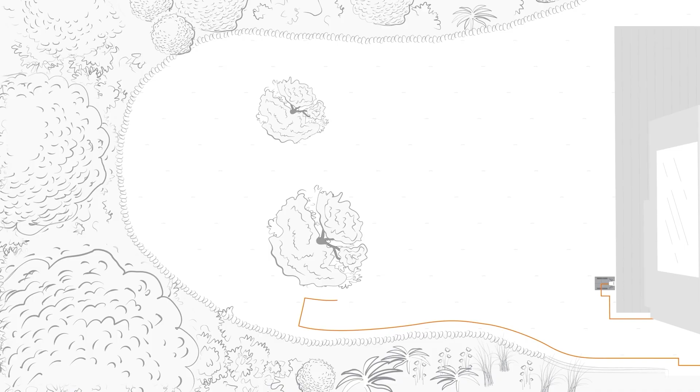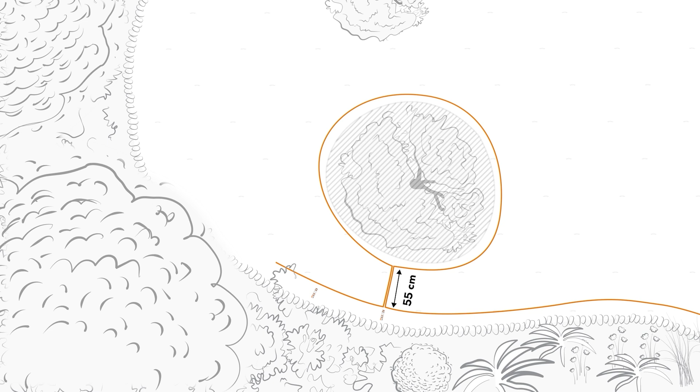Restricted areas that should not be navigated by the iMOW must be installed directly while routing the perimeter wire. To achieve this, route the wire away from the perimeter in the direction of the restricted area. Make sure to comply with the minimum distance of 55 centimeters. If in doubt, check the quick guide. Ensure that the wire runs back to the perimeter in parallel lines, close to one another. The perimeter wires should not cross each other.

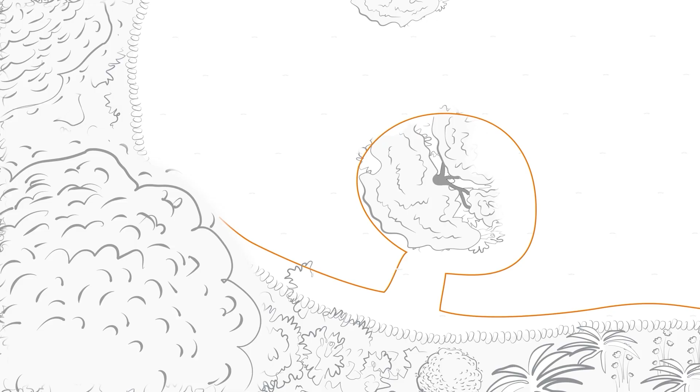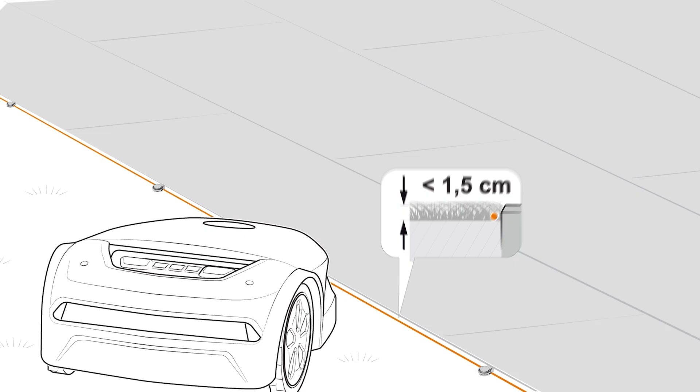Drop-off edges and water areas require a clearance of 100 centimeters from the edge. No-go areas must be blocked off at a distance of one length of the iMOW ruler. Level, navigable areas can be wired directly adjacent, as the iMOW can simply drive over edges of less than 1.5 centimeters.

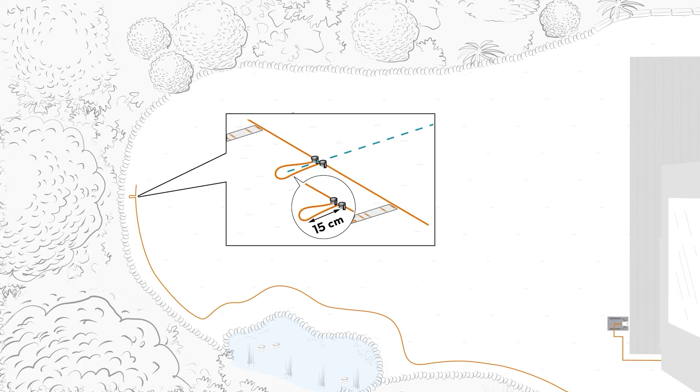Remember to install the connecting point for the guide wire during routing the perimeter wire. This connection point should be placed at the furthest point from the docking station. To do this, secure the perimeter wire at the intended area with fixing pins and form it into a loop with a length of 15 centimeters. Cut the perimeter wire at the end of the wire loop with a wire cutter.

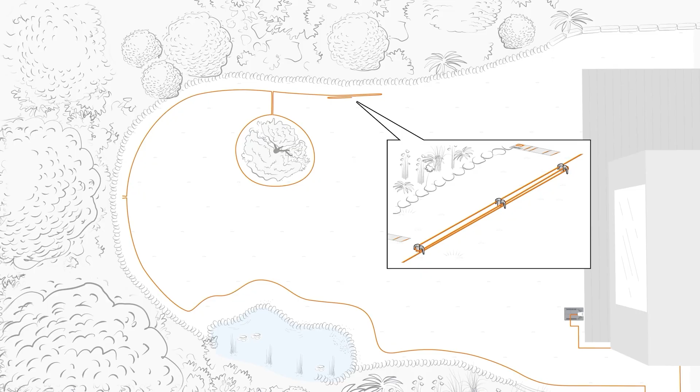We recommend that you leave some wire reserve during installation. This will make it easier to make corrections at a later date and will allow for future adjustments in the garden. To do this, lay 100 centimeters of perimeter wire in parallel lines, close to one another, without crossing the wires, and secure the wire reserve at the center with two fixing pins. Afterwards, you can continue routing the perimeter wire around the garden according to your sketch.

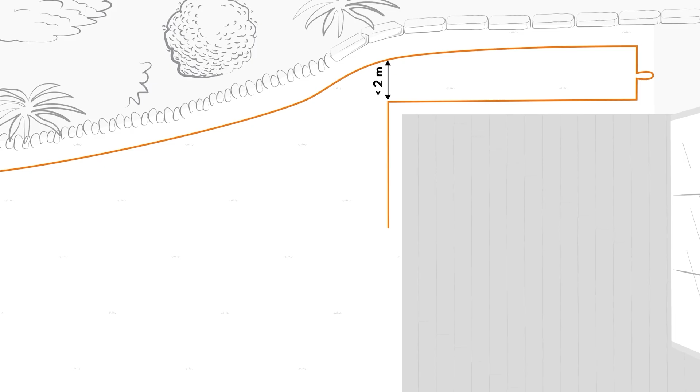If you wish to route more guide wires, for example to guide the robotic mower specifically through confined areas of less than 2 meters, you can install more connecting points on the perimeter wire. The steps for this are the same. At the intended point, the perimeter wire must first be secured in the soil and formed into a loop with a length of 15 centimeters. The loop can then be cut open at the center with a wire cutter.

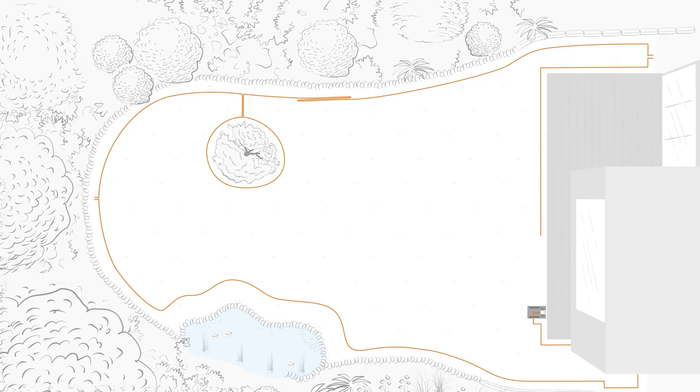As soon as you have reached the docking station again, install the perimeter wire at a distance of one length of the iMOW ruler at a right angle on the left side of the docking station. Then pin the perimeter wire close to the wire channel on the base plate. Measure the 3 widths of the docking station with the perimeter wire and cut the wire off accordingly with a wire cutter.

Then guide the wire through the clamps in the base of the station and pass it through the left duct. Finally, guide the wire through the interior of the housing and mark it with a cable marking so that you can later match it more easily. This completes the routing of the perimeter wire, and you can start to route the guide wire.